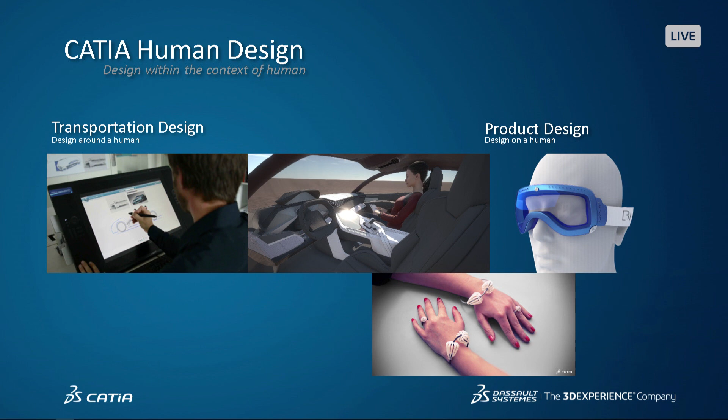So the human is the center of our considerations. So for product design, often it is the case that we design on a human. So this is, of course, an important difference, but nevertheless, we think we serve all of these requests with CATIA Human Design.

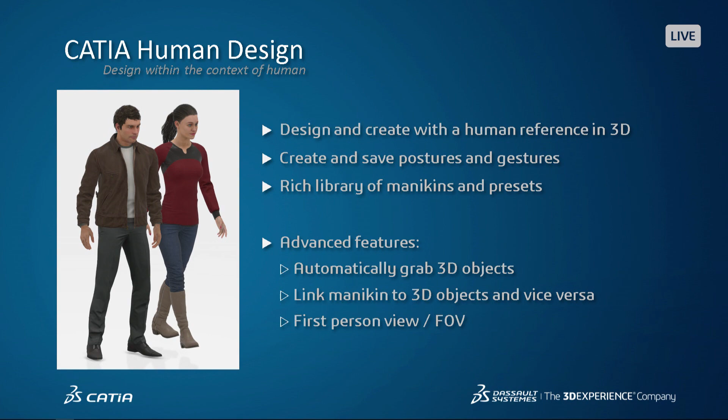And this is why we included the application in every of our creative solutions. So again, the most important takeaways here is we have mannequins of different gender, sizes, and we are able to have different postures. We have a rich library of already predefined postures and mannequins, and we have some specific features that we think will be a big benefit for the users.

So in this case, I want to show you a little aspect of human design. You see we are checking the interior of a car. And now here we see the auto grip function.

So watch closely the hands of the person. It grabs automatically the steering wheel, and we just move the hands towards the steering wheel and it will automatically attach. Now, an added value is that we can attach the hands to the object. So you see we have sort of an inverse kinematic. Once we move the product, the mannequin will adjust its arm.

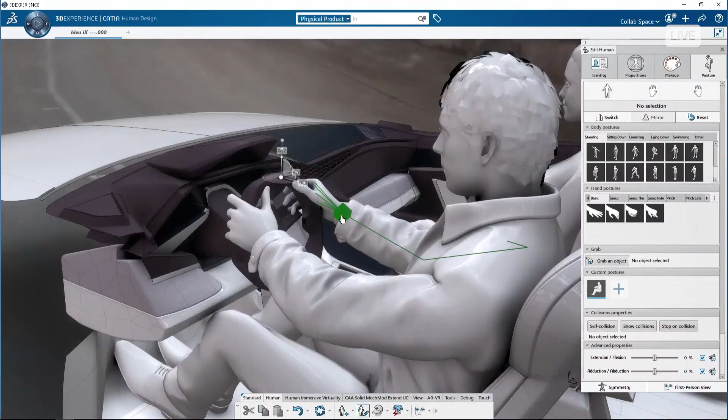We can have it the other way around, so in fact the hand is moving the object. So you see there's a lot of different applications for this, especially in the interior design, but of course for product design too.

So let's go to the next stage of concept design. We have an application called CATIA Natural Sketch, which allows you to express and communicate your creativity in 3D. We want to move you over from a 2D approach, like paper and sketches, going straight into 3D space and 3D reality.

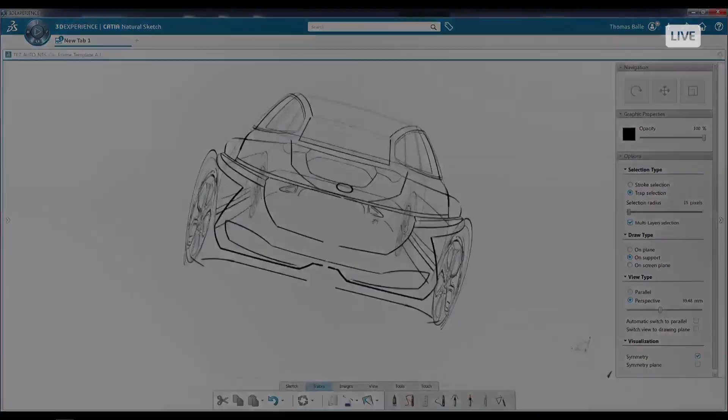Here, I would just want to illustrate a concept. This car is being done in Natural Sketch. We'll see the process a little bit later, more in depth. But my intention here is to show you that just with that little bit of wireframe, curves in space that you created thanks to using a tablet, you already have a great impression of a product. So you don't need a surface model or a detailed model to get your ideas across and some emotional aspects that you think are important in the design.

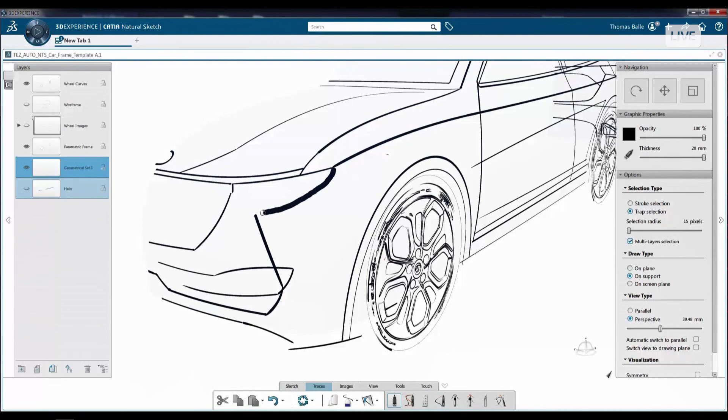For instance, here we think that the headlight is not expressive enough. And thanks to Natural Sketch, we are able to just create a 3D curve in space. Of course, what you've seen below is that there is a surface that we can sketch onto to make things easier, but it's not necessary to do so. As you can see, a design change is done very quickly and will usually work out quite well.

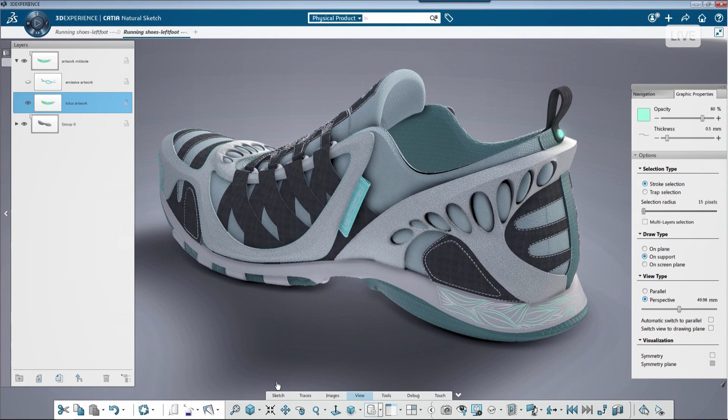In this case, we look at shoe design. The expression here of the artist is to do an ornament on a shoe, and it works out quite quickly using a tablet and directly drawing onto the shape of the shoe. Thanks to the 3D experience, you get a quite nice look and feel already in the early stages.

Another point worth mentioning is that we are not trying to mimic a pixel-based approach. As you see, we're doing curves in space. And with that technology, we are able to create directly from 3D curves, surfaces and everything that will define the volume of the object. In this case, we simply make a connection between the curves we just created in Natural Sketch, and we create surfaces straight here.

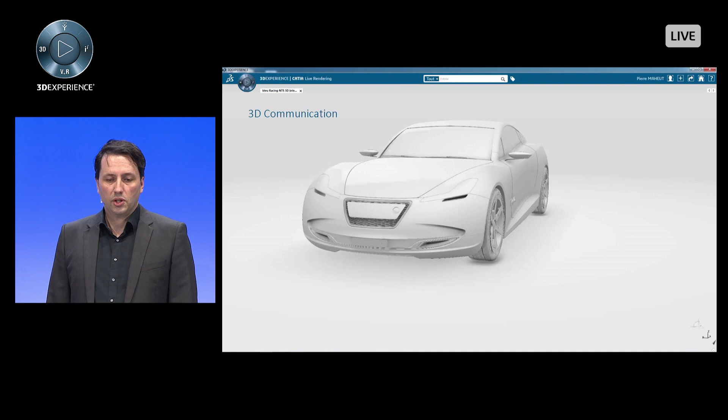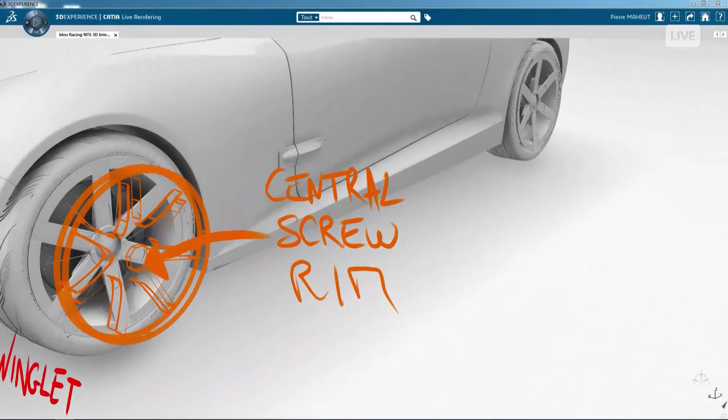Nevertheless, sometimes it's not necessary just to create something. Maybe you just want to communicate some changes on your object. So Natural Sketch has a provision for that too. It enables every user to directly sketch on the object or make comments and remarks so that you can communicate with other departments or people who are not in the same creative process as you to explain what you would expect, what you would like to see.

And the best part of it is those people can reflect their ideas back to you also in a 3D sketch. We can even integrate some artwork to make clear what we need to see on the model side, for instance. And over all of this, you see the communication is improved with Natural Sketch.

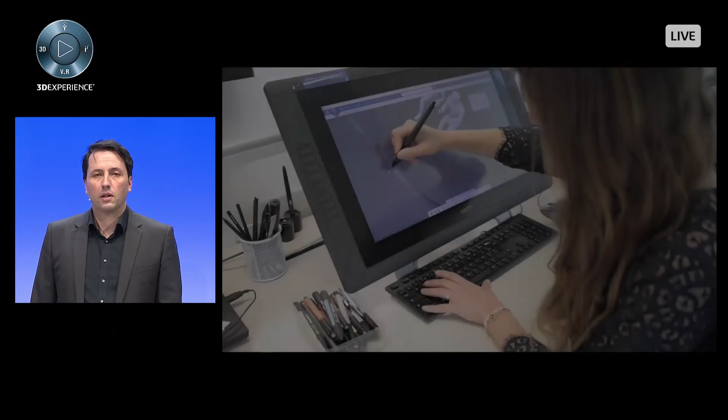So the next level would be, of course, to expand this Natural Sketch idea into VR. And this is what we are seeing here. Instead of going for a traditional approach, as you can see with the tablet, this is basically a digital pen that you use in order to draw your curves.

So we started with a little bit of design first on the tablet. We try to explore some shapes. And as you can see, we're not creating pixels, we're creating curves in space. Once we've reached a certain stage, my colleague will simply switch over to the HMD device, activate the VR application, and start to sketch something directly in VR space.

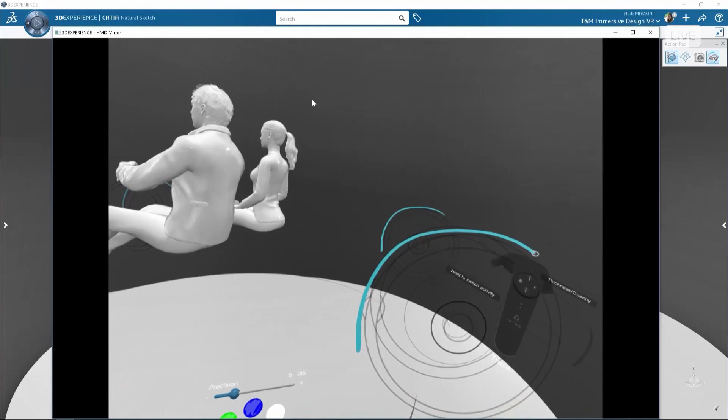As you can see, the experience is of course different because you can really understand proportions, shapes, sizes much better with an HMD device than you can do on paper or even if you use the traditional Natural Sketch.

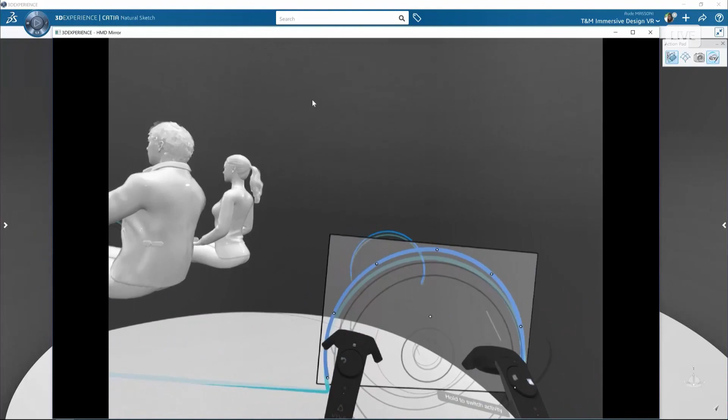As you can see, we can intuitively create some lines in here. We have some auto-snapping that allows us to connect the curves. And you see, we can move them, we can transform them, and scale, for instance. I think the best part of the application is really to create something on the fly, very creatively, just go with the flow. And even the movement in space and being immersed is a value that you should not underestimate.

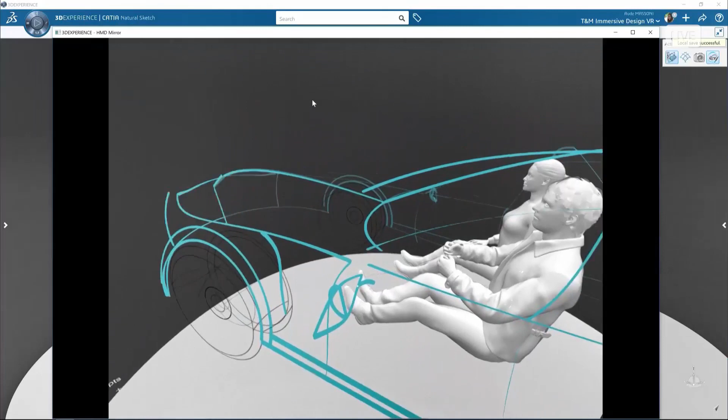In this case, you see we're just trying to refine the model. We're trying to do this wing mirror, for instance. And you see with just a little bit of a stroke here and there, you can already see this object coming to life. And of course, you can sort of display this to another person, also with an HMD.

I think it's the best way to get your creative ideas across, because often there's an issue that you exaggerate on the 2D sketch, while here in 3D space, this is all working out directly in front of your eyes. And you can see we can even create surfaces, and those surfaces stick onto the curves.

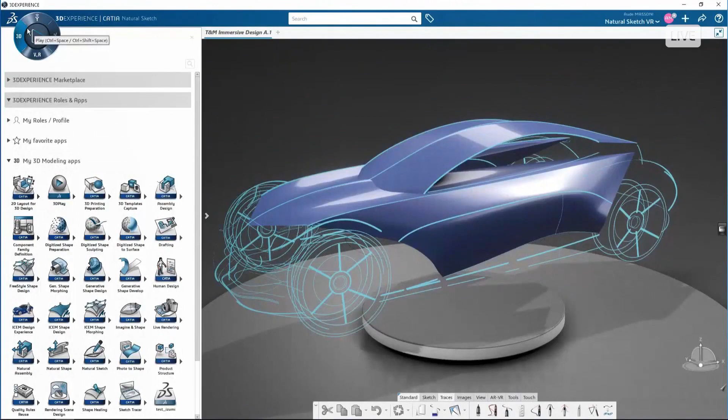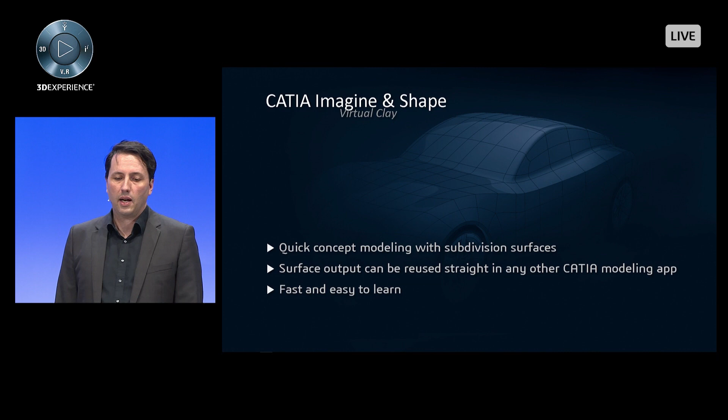Finally, if we go for the next step, we can reuse what we just did in Natural Sketch VR and use the next application, Imagine & Shape, to improve the model. Imagine & Shape is a very easy to use, quick concept modeling tool based on subdivision surfaces. The biggest benefit is that the surfaces you create are usable in any other CATIA modeling app. It's fast and easy to learn, which is a benefit too.

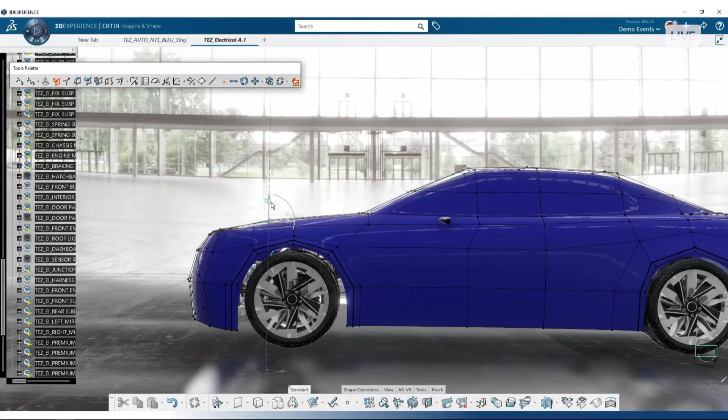I'll show you a very quick time-lapse process. As a benefit of the 3D Experience platform, we get as input, for instance, a platform of an electric vehicle, and you start to model a concept directly in subdivision surfaces. The surfaces you get are reusable in other processes, so you can pass them to engineering. A quality benefit is that the surfaces themselves are curvature continuous, so you don't have to worry about that aspect.

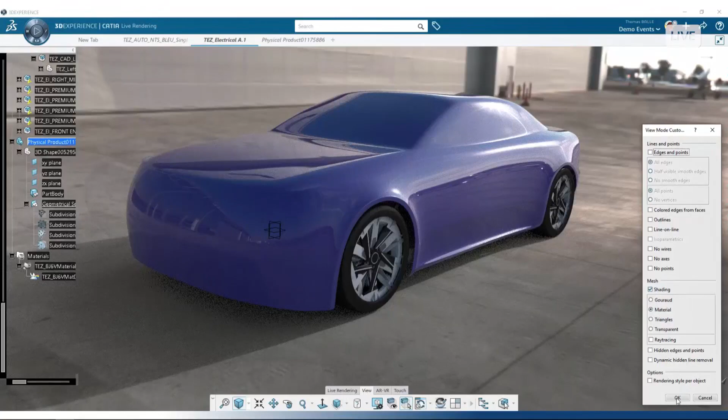You see me here making very quick modifications that usually take a lot of time if created with standard surfacing tools. This is really about shaping and experiencing in a quick fashion. Thanks to the good visualization in 3D Experience, with real-time visualization and live rendering based on a GPU rendering process, we get a quick display of our model and can check the quality. You can see the model rendered in real time with all the reflections, so you can check at first glance if the quality is okay.

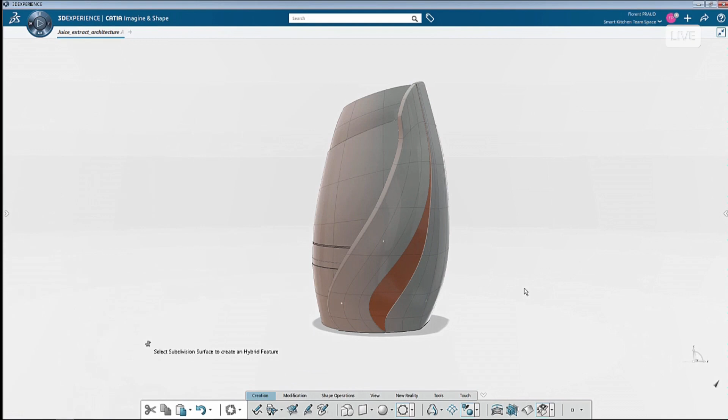Nevertheless, we have something different here. Often in industrial design, you have the issue of how to create patterns and put them on a 3D object. With a little tool inside Imagine Shape, we are able to deform a subdivision surface based on a picture input. This way, you really create a surface that is manufacturable in a sense. It's not a trick, not a texture, not a bump map — it's actually deforming the surface, so it can be used for 3D printing, especially on those tiny little details.

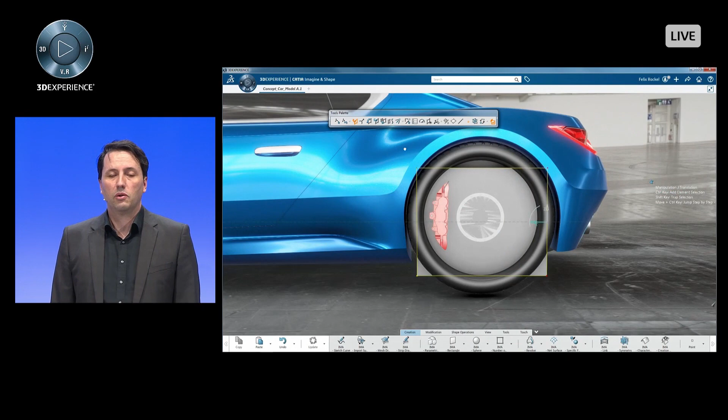There's another use for this. When we want to do a rim design, we could start with the usual approach of creating a revolved surface and doing a pattern and so on, but there's a much easier process — it's the same functionality all over again. You create a basic subdivision surface and simply place the image of the design you made in some other application, pixel-based, directly onto this surface. You position the image, and you can already see that we can deform the surface really in 3D.

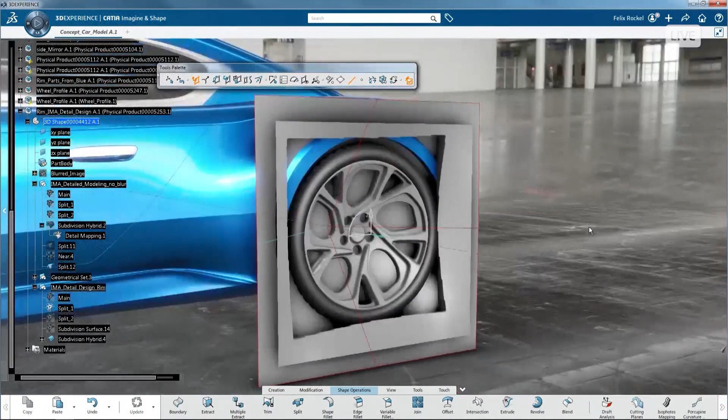When we modify the surface, the modification updates automatically. You see we're trying to go from a flat surface, a flat rim, to something concave, convex, whatever you like to do. Now the power of the 3D Experience and CATIA platform is that you can use conventional surfacing tools to, for instance, split the surface. This is a live process — we've taken something that usually takes hours to something done in minutes.

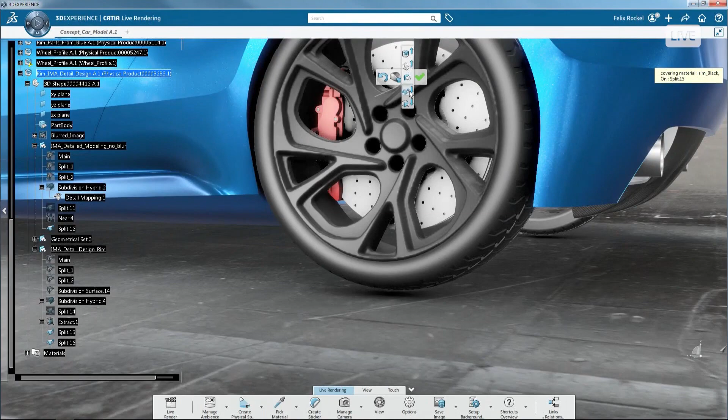Another aspect of Imagine Shape is the possibility to work directly on polygon data, which is usually scan data in our processes. In this case, the back of a car has been changed in the physical model, and with the use of an optical scanner, we can pull it back into CATIA. With Imagine Shape, we're quickly able to recreate the area we need to change, adding surface polygons directly onto the scan with minimal deviation. In no time, we're able to recreate an area that would normally take at least an hour using standard, traditional process tools.

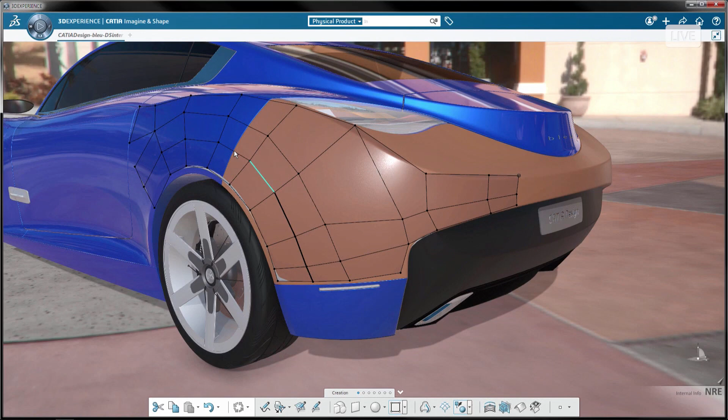Especially the quality aspect needs to be highlighted because these surfaces you create are curvature continuous, and that's a big benefit. You can see the highlights and reflections are working out quite well, and you're pretty much done at this point and can pass the data back to engineering.

So to something completely different, but which is part of the concept design too - our new tool called CATIA xGenerative Design. The idea is how to create something like a very complex pattern in an automated fashion. This tool is algorithm-based and creates patterns based on procedures, with a node-based visual interface that lets you quickly create difficult shapes just by connecting nodes in a graph. One thing to highlight is this is our first browser-based solution.

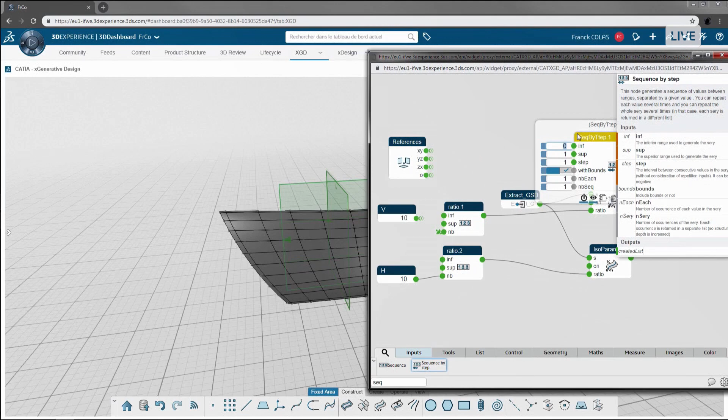In this example, we try to do something for a front grille of a car. First we start with a more or less standard knowledgeware approach, defining parameters and adding those to create some curves. Once we cross this stage, we open up the graph in xGenerative Design. Now the approach is a little different - we have a visual interface with different operations as nodes, and you connect these nodes to automatically produce a mass of objects of the same type and fashion. We add nodes and operations to end up with a very complex shape for a grille, creating procedurally surfaces, points, curves, and in the end you get a complex mesh that you can easily modify using some basic parameters.

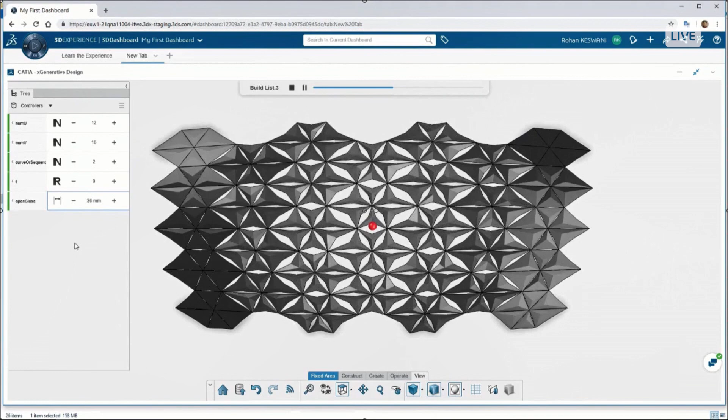I just want to give you some impressions of what could be possible, in this case for a cabin interior. You can explore a lot of shapes and different patterns in no time.

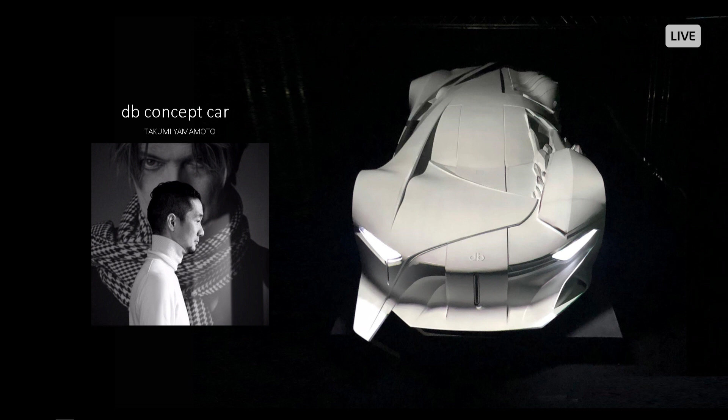A project we did lately using xGenerative Design is the so-called DB concept car. It was created by Mr. Yamamoto, and the idea was to create a car for David Bowie, expressing the different personalities and characters that David Bowie played over his career. The car is very unconventional, and the challenge was how to create something very complicated. The creative process was quite interesting because we had to involve so many different designs, features, and ideas. I think it would be impossible to do with a traditional parametric approach or even manually.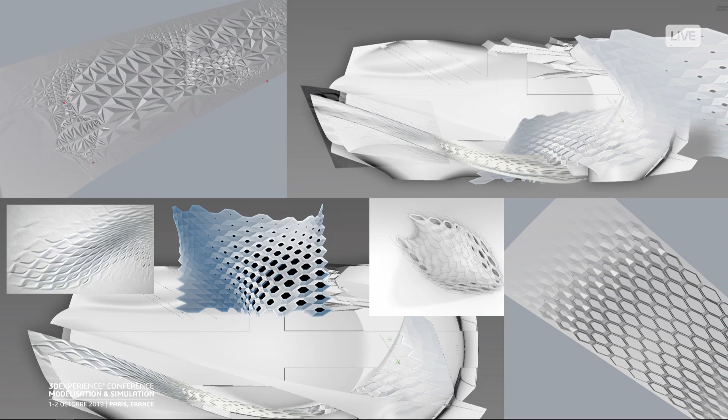One of the things you can see here is that we can even use audio files as an input for the creation of geometry. In this case, we tried to have this as an input for the creation of the mesh on the side of the car. The process is we create the boundaries of all these tiny pieces and then connect these elements to the center boundaries, getting a nice, interesting, organic-looking pattern. It's just one example of the many different examples that could be produced with xGenerative Design.

Coming over to Class A surfacing - why is Class A surfacing part of the concept design? In the traditional process, many companies use Class A surfacing tools also in the very early concept stages. CATIA ICEM is our tool for Class A, but it can be used for concept design too, because it's associative, parametrical Class A. The benefit here is it's based on the ICEM Surf solution, which is the number one Class A surfacing tool in the world.

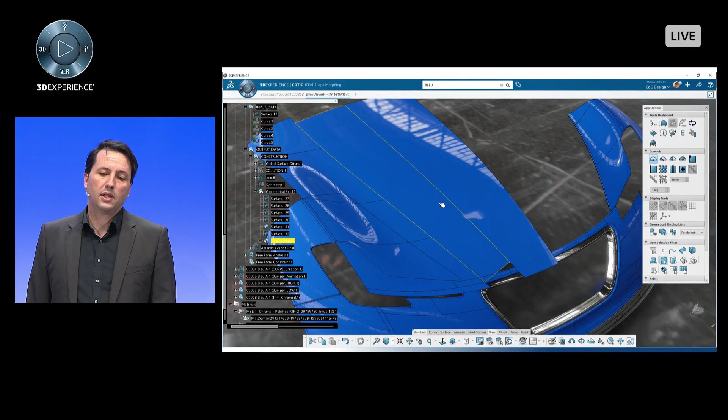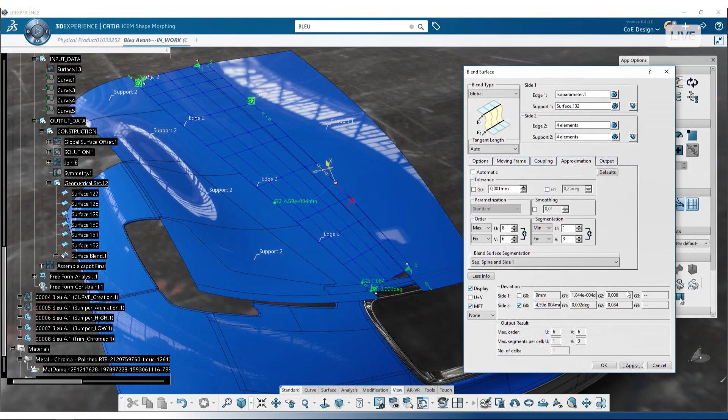I want to show you a little bit of what CATIA ICEM can bring to concept modeling. Here we see a part of our blue car. The important thing for a CATIA user to understand is that thanks to CATIA ICEM, you're able to access the whole mathematic properties of a surface. You can modify the segmentation, the amount of control points, and change the tolerances - one of the big issues when you start a concept model, since maybe you don't want too high tolerances regarding surface connectivity. So you can use this tool to have early concepts with already high quality.

You can change, for instance, between the Bezier representation that we prefer in ICEM Surf, and the classical NURBS representation of surfaces, as we do in CATIA. So it's just one example here.

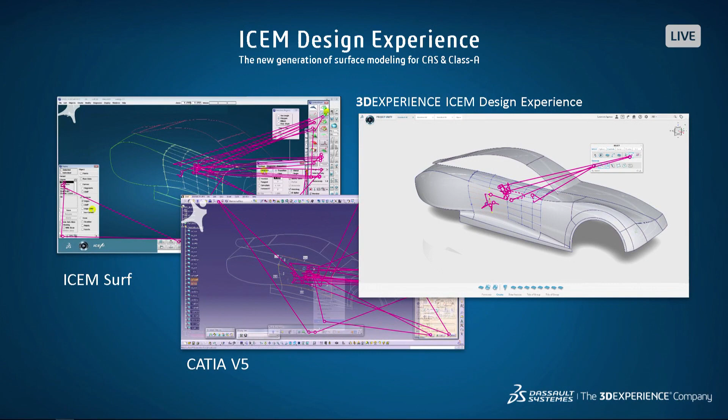Taking it to the next level, I'd like to point out where we come from, which is more or less ICEM Surf. Then we moved over to CATIA ICEM. Now with our latest development, we're offering an app called ICEM Design Experience. It has a new user experience, and the same direct modeling approach as the two other solutions, but a different user interface approach. So we looked at all our applications and found we need to streamline the interaction of the user with the software.

Thanks to the 3D experience, we have a different approach. We can have the surface-based approach, the curve-based approach, and on top of it, something we call soft parametrics, which is more or less deciding if you want to do your modeling with all the associativity, or more old school without any history. I want to show you a little bit of an example on the user interface and the changes thereof.

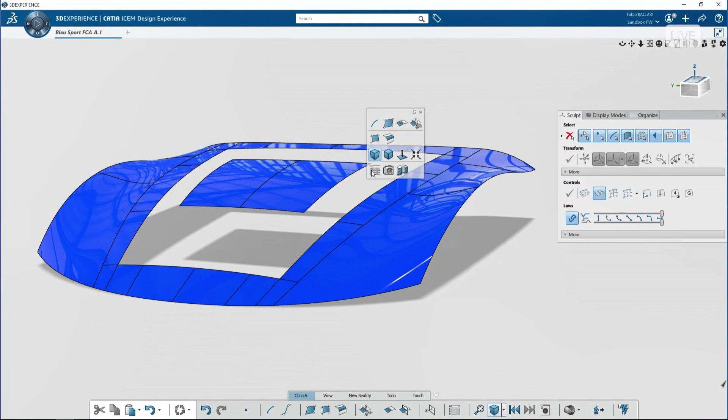A big part of the new development is how you, as a user, can interact and indicate to the system what you want to create. Instead of defining 'I want to create a blend here,' you just select the two surfaces you want to connect, and basically the system will understand, based on the number of inputs, what is expected. And you see we can directly model the surfaces in order to increase the quality, the highlights.

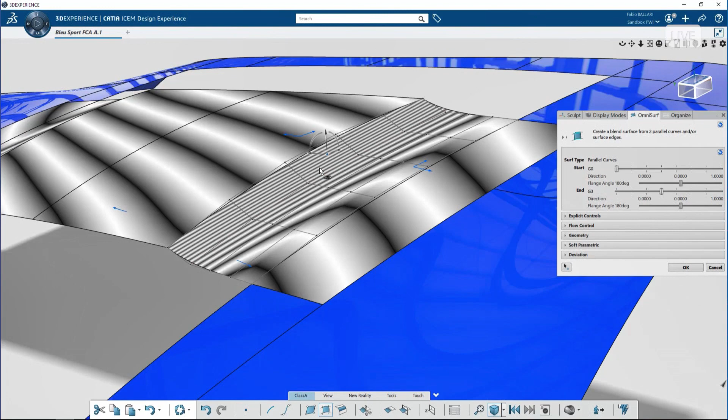Here's a little example on how to optimize the quality. Now going to the next step, we see with only two inputs we create a blend, and you see how quick it works. You just hover over the two edges and you get the connection.

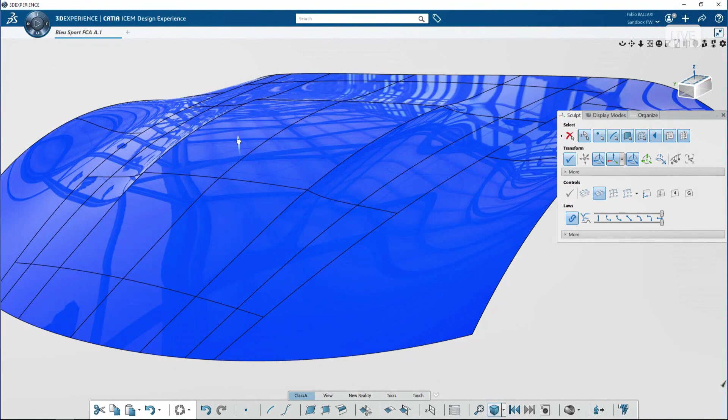Now the interesting part is when we move over to a 4-sided patch situation, as you can see here on the top. We just do a stroke, a selection stroke, over all of these four edges, and we close it with a fill type of surface, of the highest quality. This is going to be the future, and I'm hoping we're going to see more in the next release.

In that sense, I can hand over to Ugo, because we are talking about product experience now.

Thanks, Thomas. So now you've seen all the creative process with Natural Sketch, Imagine & Shape, our Class A surfaces, and Generative Design too. Now let's go to experience your product. We have an application named Product Perception Experience, and it will allow you to represent all the stages, the variants, and the behavior of your products.

So how does it look? We have this user interface, and in real time you have your product, and you'll be able to quickly create and reproduce all the variants of your product. Here, for instance, we are looking with different camera angles, and we'll be able to switch off materials, geometries, switch and compare your design, and of course you'll be able to create animation and move your part.

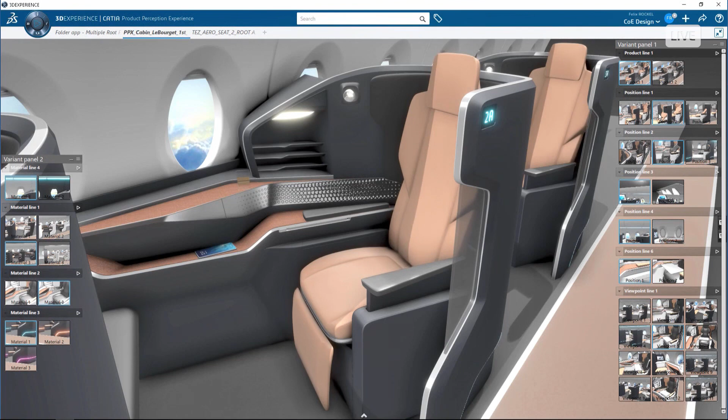Like this, you will represent all the behavior and all the variants of your product. With this simple user interface, you just have to click and play all the stages of it. It's really great when you've designed your product and have this realistic environment and materials. Now you can have a design review, or give your board or management the capability to review all your product design.

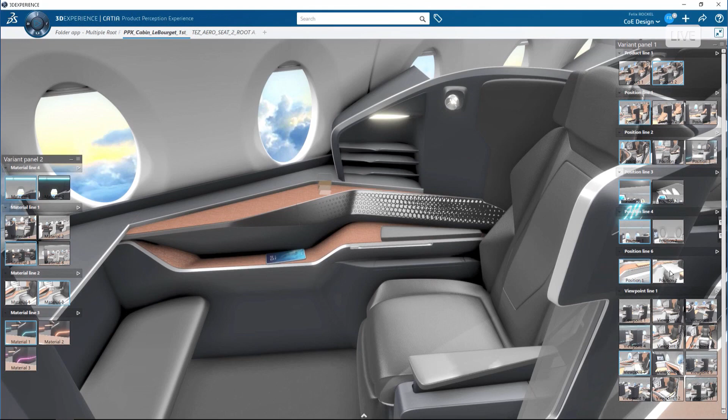So you see we have very various scenarios we can offer here: move variants, cameras, be the user, get the user perception for example, and quickly shift between states.

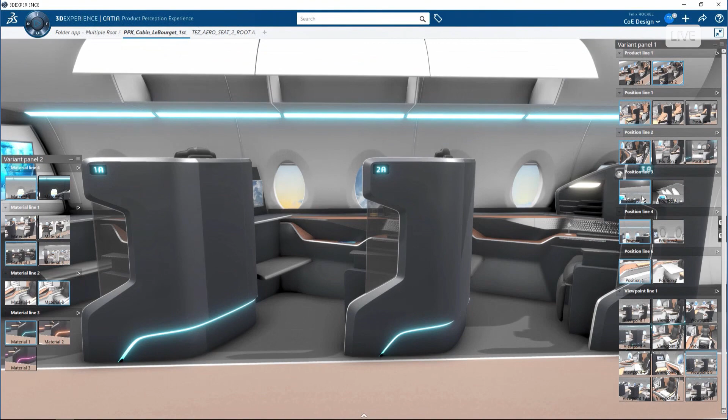To achieve this, we have different tools embedded inside this application. Here we have the trigger. With the trigger, you just select the geometries you want to use, the ones you want to expose as a trigger, and you just decide which variants you will play.

Here we will play with the car paint of the car, selecting the body of the car, the variant we will play. With these features we will highlight which geometries you can click onto, and then when you go into play mode, you'll be able to select the body of the car and switch your variants of car paint. You see, in two to three clicks, I made this trigger on.

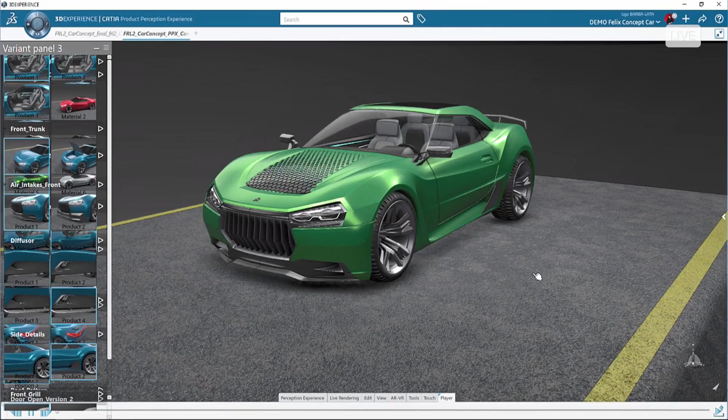Of course, you can switch off cameras, you can switch off geometries. So here we will select the hood and switch on the pattern on the hood, made with xGenerative design. Again, in a few clicks, with low skills and knowledge, you can create such interaction with your product.

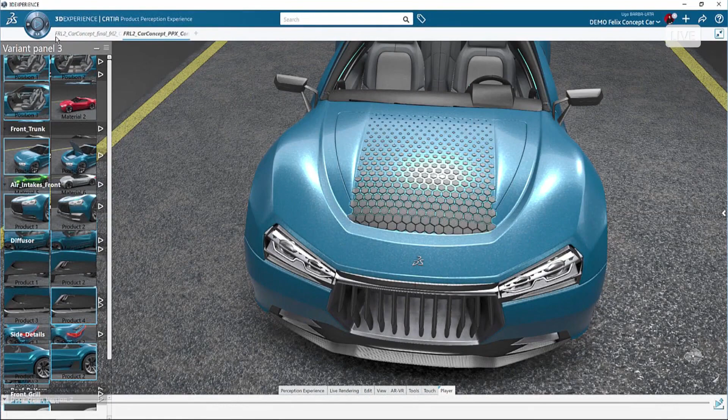Of course, we offer some integrated behavior inside this application, which means you don't need scripting or a lot of knowledge to achieve such animation and behavior. So here I will simply ask my door to open and close. I will define my point of rotation, the geometries I want to rotate. Then when I go into play mode by clicking on it, I create a quick animation and interaction with the product. Very fast to achieve.

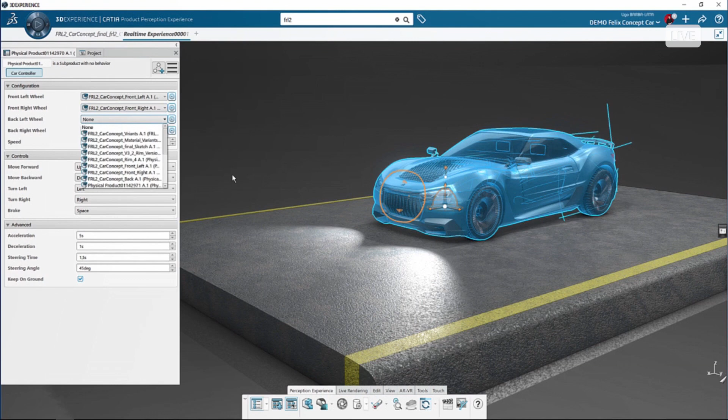And of course, if you want to interact more or have a bit more fun with your product, we have the controller behavior embedded inside our application. So with a few clicks, I will select the body of my car, every rim, and it will allow me to control the car and drive it with the keyboard inside the scene. So when everything is ready, just click play, and with my keyboard I will move my product. You see, it took me 10 clicks, not more, to achieve this.

But of course, now that you have experienced your product, you want to visualize it in a realistic, physical-based way. For that, we have an application named Live Rendering, offered with most of our roles. How do we go from here, with your native data, no materials and no lighting on top, to here?

It's simple. We have in Live Rendering, inside the platform, a physical-based render engine named Stellar. It offers ray tracing, real-time ray tracing, GPU capabilities, and of course the OptiX denoiser from NVIDIA. You will be able to import and use calibrated material or procedurals, and with realistic lighting and ambiances, you will be able to have a physical representation of your product.

For this, we offer a lot of possibilities in terms of materials. First, substance material, which is procedural and will allow you to quickly create nice appearance of materials. Then we have DS PBR material, which is the most common offering in terms of materials and exchanging between different software. And then we have AXF file format support from X-Rite, which will allow you to scan material and have a physical-based representation.

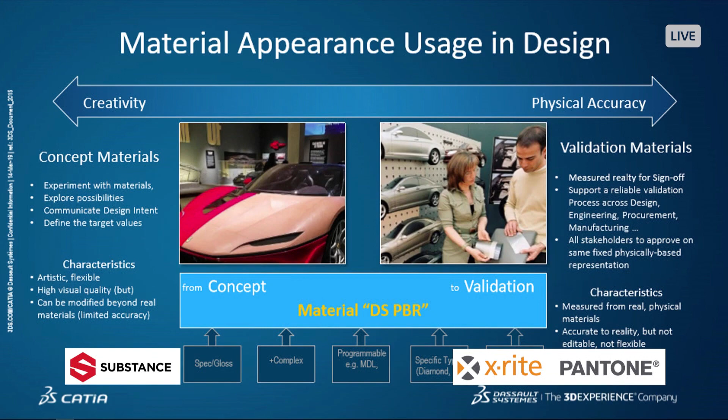So this is how the DS PBR is looking. It's a layer-based approach, and with a lot of settings, you will be able to reproduce every kind of material our render engine can offer. Of course you can have high quality of flakes, of covering, of coatings, and of course of emissive materials.

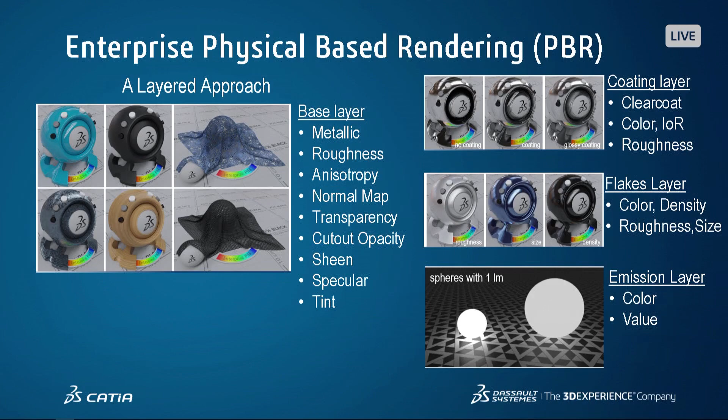And we support AXF file formats, which will allow you to get physical samples scanned, import the file inside the platform, and have a realistic appearance of your shape with this material applied onto it. Of course, as it's physical-based and it's a scan material, you will not be able to tweak it, modify it, or alter its realism, which is a benefit for companies that seek to unify their material library. Exactly, this file format can go from design to perceived quality and then to marketing with a single file format.

Okay, and we have talked about materials, now let's talk about lighting. You need to get realistic lighting on top of your material. We name this ambiences, and to achieve this kind of representation you will need to import HDR files. It could be captures of your design room, your physical mock-up room, or your showrooms. All of this integrated inside the platform, you will get realistic lighting and surrounding around your product.

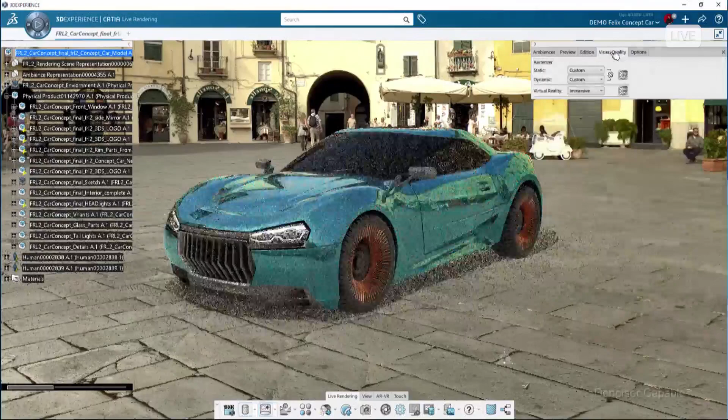So here, it's how it looks like in Live Rendering. We are in the real-time mode, and when we turn on the ray tracer, which is the global illumination mode, you will get a realistic appearance with correct lighting, shadowing, reflection, and refraction. Of course, we have the denoiser embedded, so you see with just a few frames, we get crisp images.

Of course, our Stellar render engine is GPU capable, which means you can really accelerate the way you render your product, and this GPU-based mode is available with real-time ray tracing. So here, defining it, you can change your visual quality, for example, and define all your settings of ray tracing, and you can save it, which means if you have defined your correct settings, you can just save it, reuse it, and share it.

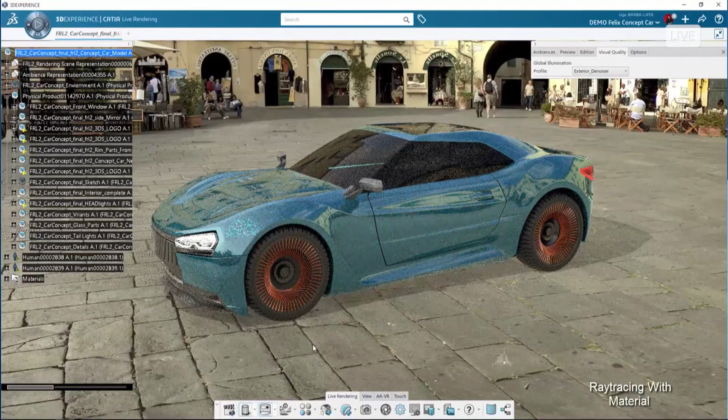No mistakes then. And now we will enable ray tracing with materials, and we will have real-time ray tracing, GPU-based, giving you quick and fast visualization applied onto your product. It will allow you to make really fast decision taking. And on top right, we are just reusing the ray tracing settings we set before.

Yeah, very fast and very crisp images.

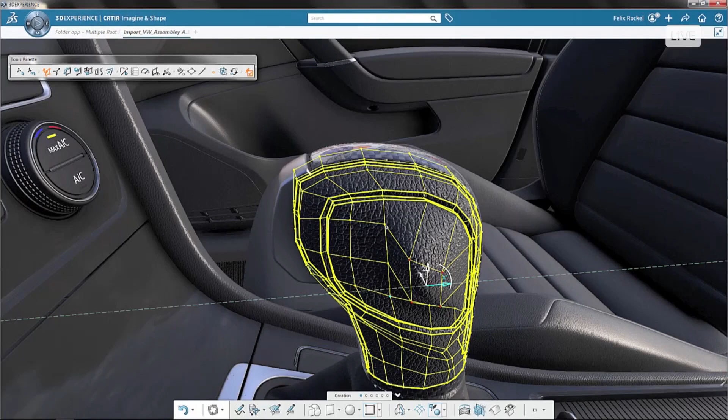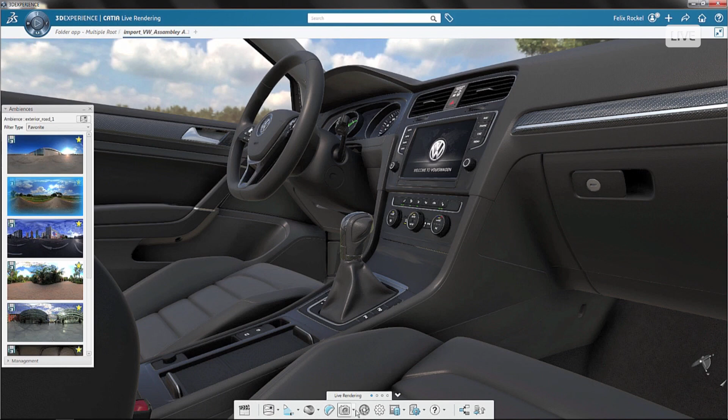On top of that, as explained earlier, we don't have to re-import new data, convert again, and go for visualization and VR. All the tools and the render engine are embedded inside the platform, which means anytime you can modify your geometries with a realistic appearance of materials and lighting, just move around, reshape your surface, and start to visualize your design change. All of this is real time, it will not take more than 2 minutes to achieve. Then you can switch environment ambiences just to validate your design in different lighting configurations.

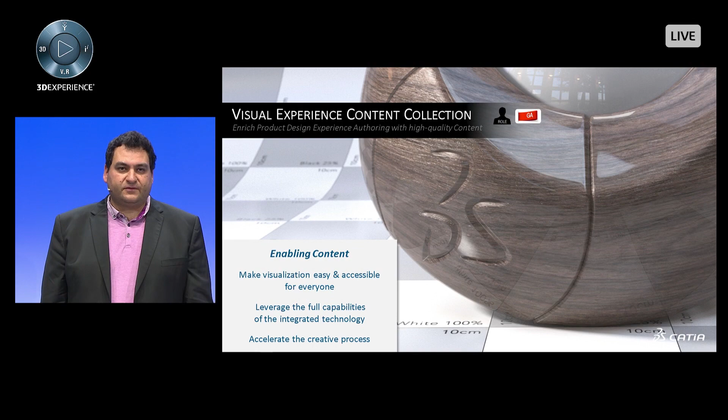But if you don't have knowledge of achieving such realistic appearance in terms of materials, ambiences, and humans, we offer Visual Experience Content Collection, which is a library of content you will use inside the platform. We offer 9 categories of high definition materials, which means if you do close-up or ray tracing, you will have crisp appearance of your shape.

Inside this content collection, we also offer ambiences. It's calibrated, measured lighting, and you will get crisp reflection. It's 8K definition ambiences, so for every close-up and ray traced image, the quality will be there. And of course, on top, we offer different size, gender, and type of humans.

Now let's continue to talk about human design. As you have designed onto or around the humans, now let's validate your product with the human. You design your product, but you need to check how the human will interact with it, how he will use it, how the product behaves with him.

Here's an example. Inside human design, you import the human you have from your content collection, and then you will define postures. It's really simple - you have predefined postures, you can tweak it, and you can create such scenarios of use of your car. Here, for example, I'm showing that the human wants to modify temperature inside the cockpit, and he will just turn a bit his air vents, and I will create this suite of postures.

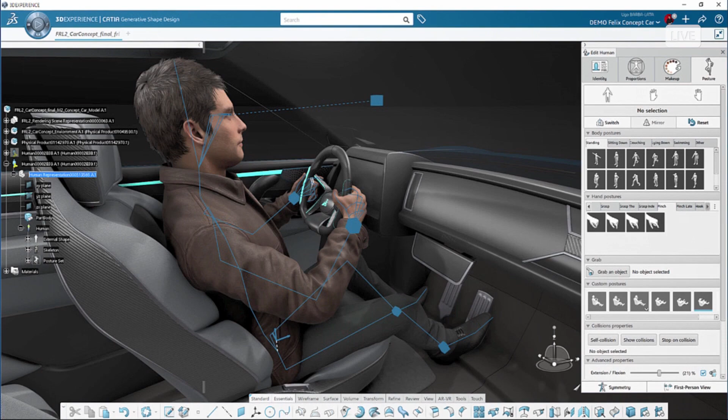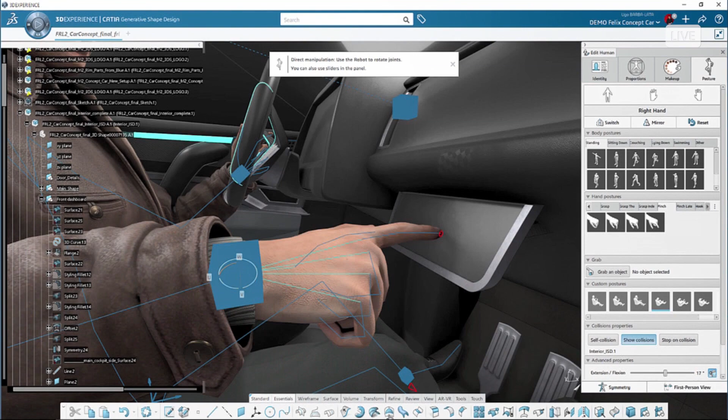Of course, you can do close-up, it's real time, not compute-based. You can just move slightly between postures, and you'll see that when I change the heater temperature and reach my vents, I will collide with my geometries. This means with this application, you can move your air conditioning buttons, or move position, move area, just to avoid these colliding situations. So it's fast visualization and fast decision making to move objects.

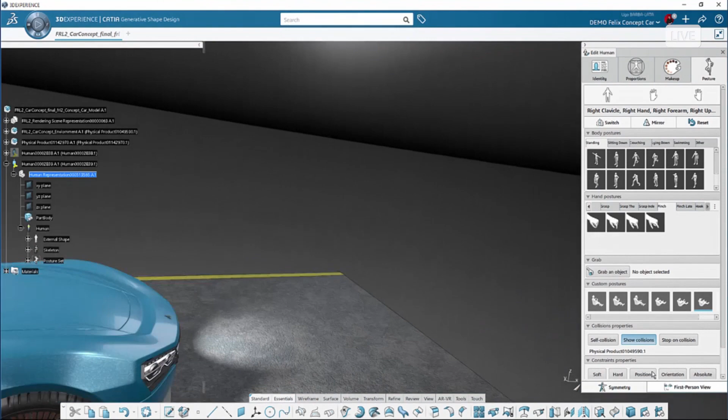What could be better than to be at the first-person view, just to experience what the user will get from your products. So here I'm at the first-person view, and I will just play my postures to understand where my user, my consumer, will have a look. I can see that some elements I can see well, and some others I cannot see very well, because they're hidden behind some geometries.

As we have validated our design, now let's go for perceived quality. In terms of perceived quality, we offer a lot of use cases on the platform. It could be surface validation, cubing, interior, exterior appearance, applied with realistic materials and variants.

Here, for example, we see that with the Stellar engine and the ray tracer on, we can validate reflection on the windshield of the car - which materials, color, or glossy appearance will reflect inside my windshield and disturb my driving experience. You can also see all the icons, the shapes looking beside each other.

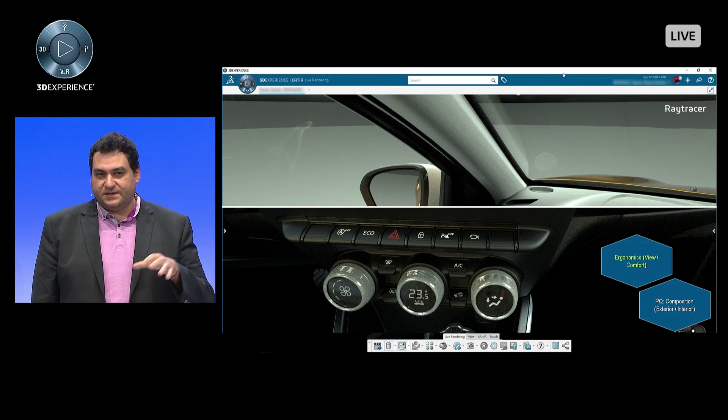So if you apply a glossy material with something painted, for example, or if the icon is not well positioned, your consumer will not have a correct experience of your product - meaning how he perceives the quality of your product is not there. Even if he didn't drive your car, just sitting inside, they will expect more quality.

If we compare the real-time model and ray tracing, in real time we don't have realistic shadowing. But when I turn on ray tracing, I can clearly see that my cooling system behind the front grille will be hidden by shadows. And in the gap between the outer lens of my headlamp and the grille, in real time I can see through, but with realistic shadowing thanks to ray tracing, everything is hidden.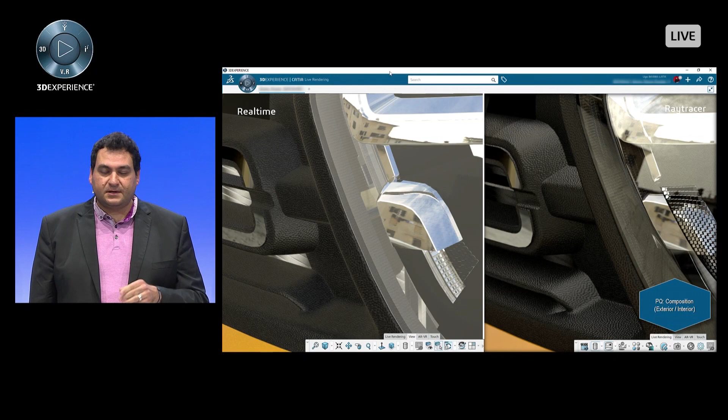Here's the same thing. If you've designed the metal of the trunk, for example here, we see this technical shape which is not really hidden with ray tracing on. This will allow you to early redefine its position, turn on ray tracing again, and validate if it's more qualitative, more well perceived.

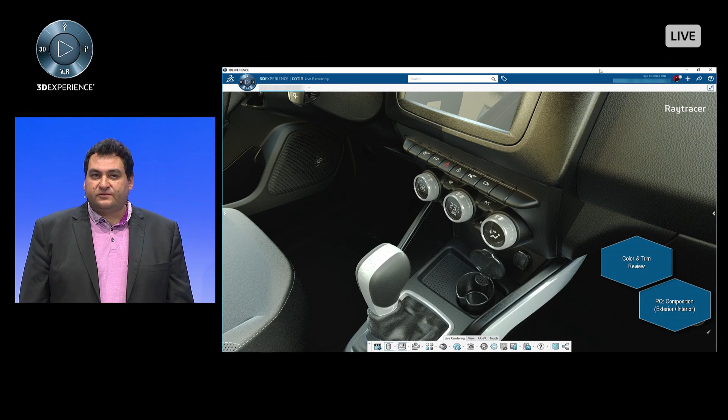And of course, as you have all your data and materials, your product is fully assembled, fully dressed with material and correct lighting. Now you can do trim and color review with perceived quality on top. You can decide if a material will fit your product, or if you have to change something earlier, without waiting to get a physical mock-up, which you'll get 18 months before production—maybe too late to change the design or the supplier and material applied to it.

Here again, you can do surface validation with gap management and visibility through gaps. And on the right, as you have animated your products—open doors, and all the cubing stuff around your product—you can validate every appearance at every stage of your car, every use that the consumer will do with it.

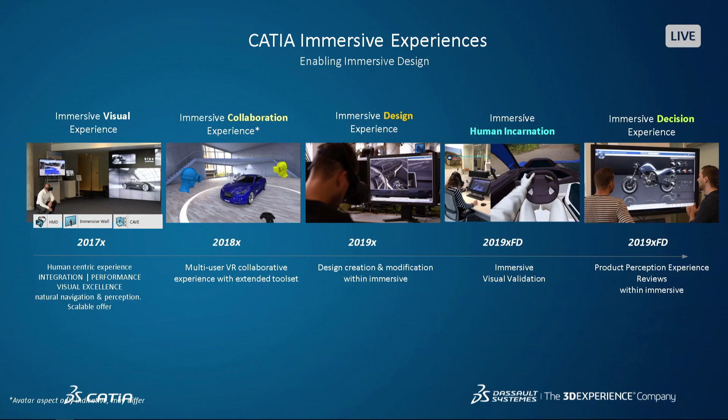So we have done the creative phase, we have done design validation, we have experienced our product. What's better than to experience it with our VR and immersive tools? You see across our releases, we offer new features integrated into the applications we offer. And all of this doesn't need a conversion of time or decreasing the quality of your products—you just have to turn on the VR solutions we offer.

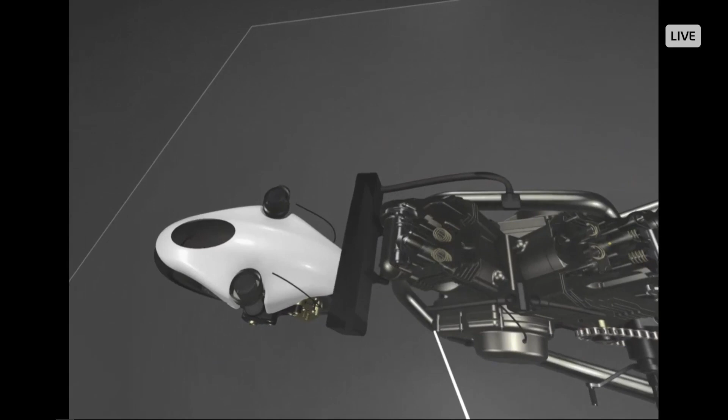So here you see we have turned on the VR with HMDs, and we are just exploring our products. We offer a lot of features like cutting, just to see what is visible between geometries, if you want to explore more of your product without hiding stuff. Or you can simply hide elements one by one just to reach what you want to visualize. On top of this, we offer transparency mode.

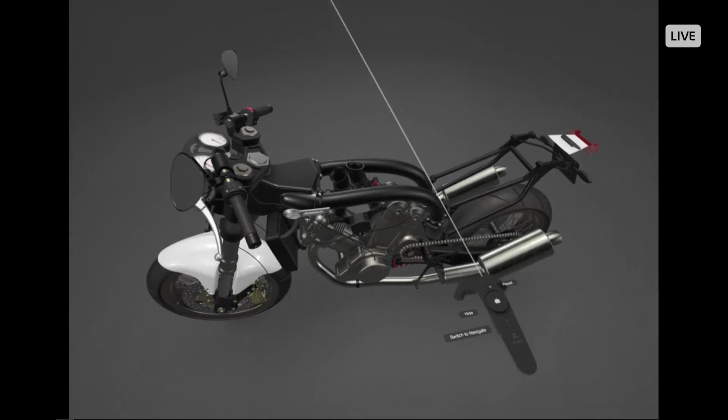So just by triggering and clicking, you will hide or make transparent elements. It's real time, very interactive with your models—clicking, hiding. And of course, you can explode your model. Instead of making everything hidden, you just have to explode and explore again.

Of course, we support cave, multi-face setups. So again, with head tracking, you can visualize your product with no conversion and no optimization of your data. Just turn on the cave mode, and you'll be able to have such a review. And of course, you can still interact with your product.

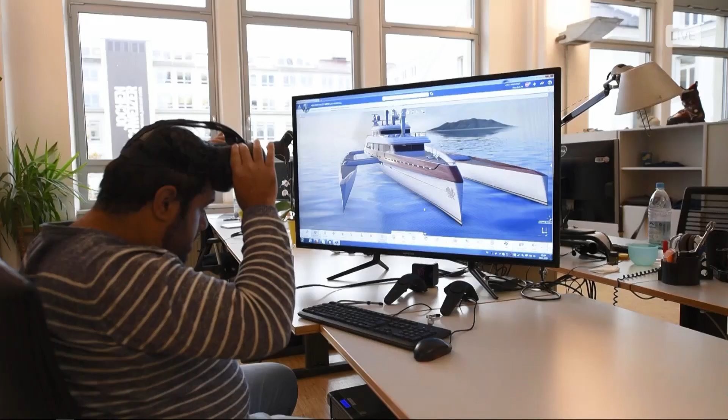We also offer collaboration between multi-seats. This means you'll send your data to someone else, stream your data, and someone else will be able to visualize and be in the same scene as you. So here we have two different seats. We just ping each other with a chat and say, can we have a review now?

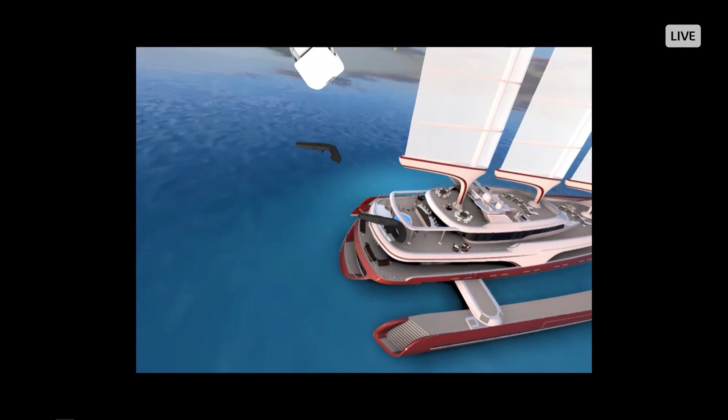So let's start to explore our model. Here we see we can interact, we can see who else is inside my immersive experience. You'll be able to show to your counterpart, to another location or another person in your department, what he wants to show, to see, and you can simply trigger to his headset, to his avatar, and fly into his position.

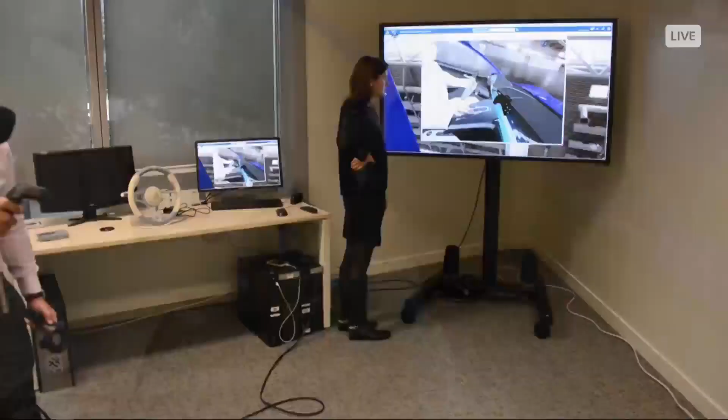Of course, you see that with Natural Sketch, for the creative side, you can also do VR, which means put on your headset and just explore your design again, or you can draw, as you saw with Thomas. This means if you're not happy about your design, if you want to reshape, remodel, or modify a surface because its appearance or reflection doesn't fit what you want, you can also do it in VR. It's really simple—you just toggle VR, trigger and click, and modify your surface, create new ones or modify existing ones, with realism applied on it. So you keep your material and your lighting.

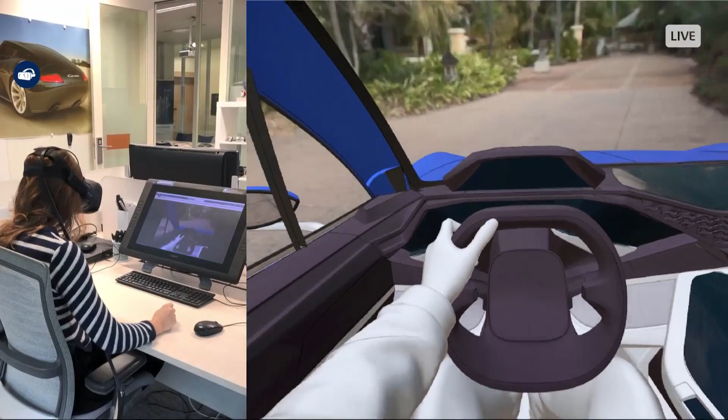You saw with human design you can have the first-person view, but what about experiencing what the human or your consumer will get from your product? You select your human, be at its place, and with the HMD, you'll be able to watch and explore what is around, reaching a new level of what is visible, accessible, and what your consumer will get from your design.

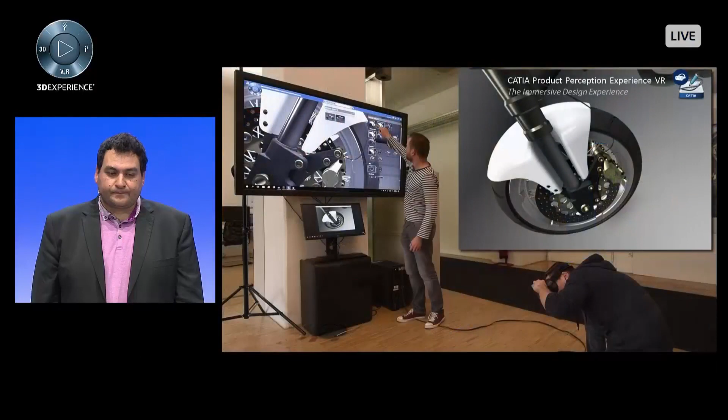We also offer the VR mode inside Product Perception Experience. Once you have defined your trigger, your variants of camera, of materials, position, geometries, put your headset on and start to experience your product. As usual, it's real time.

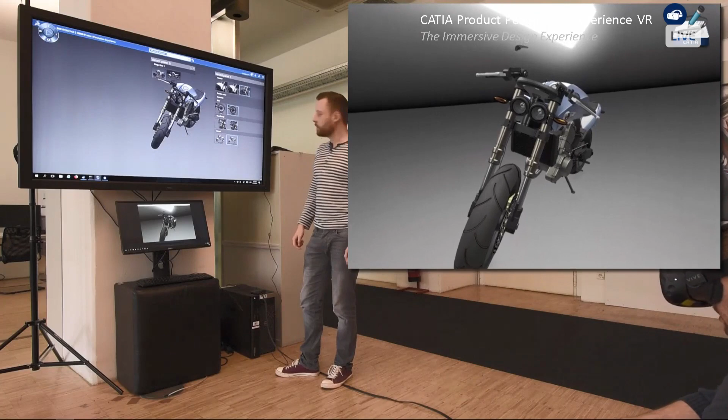Here we have someone who is triggering the scene and another one who is experiencing it. You can define triggers and trigger your scene with your controllers in real time in HMD. This way you'll be able to explore the variants and all the behavior of your product.

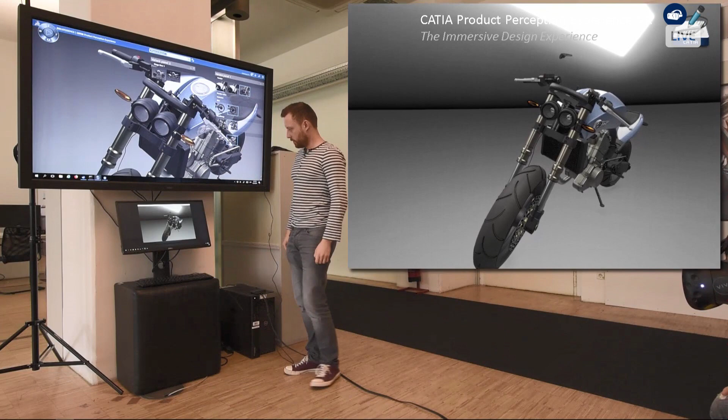So this is all the offering we have about VR and immersive tools embedded inside the platform, using realistic appearance and also allowing at any time to do sketching or surface modification to modify your design. And of course, all of this embedded in one tool, in our 3D Experience platform.

Thomas, we have a question. Can I reuse the Imagine Shape subdivision in any CATIA application? Yes, in fact this is, I think, the biggest benefit of having the subdivision modeler within CATIA.

We know that subdivision is a tool other vendors also offer, but they have the problem that they need to convert the data to use it for the surfacing process, and often the surfaces are unusable because of their mathematic nature. This part in CATIA is hidden from the user. It's managed by CATIA, so you can do offsets, split surfaces. It's ideal to go from concept to engineering, and even for engineers to modify something and play that proposal back to a stylist. That's really the biggest benefit I see. It's usable in every CATIA modeling app we have.

Another question: how is it to switch from an application to another inside the platform? That's very simple. We have the compass that opens up to the sector where all the 3D applications are available, so it's basically 2 clicks to do it. Sometimes it's even much easier.

For instance, you showed live rendering. When you go from modeling to visualization, you just double click on a structure in the specification tree, for instance the product, which is the assembly of the part, and automatically the app changes to the live rendering mode. You press a button and you have the visualization. When you go back to the part level, you're back in the subdivision modeling. So this is 1 or 2 clicks sometimes.